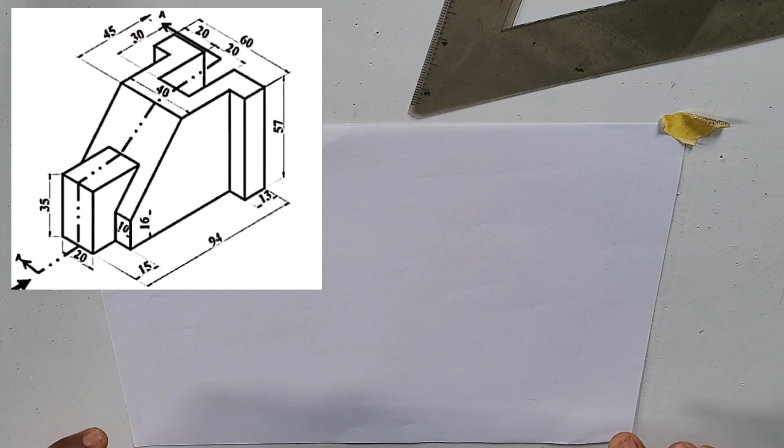Today we are going to draw an isometric drawing as you can see on the screen. To start the isometric drawing, we're going to first draw our horizontal baseline. This line can be of any length. Pick any point on this line.

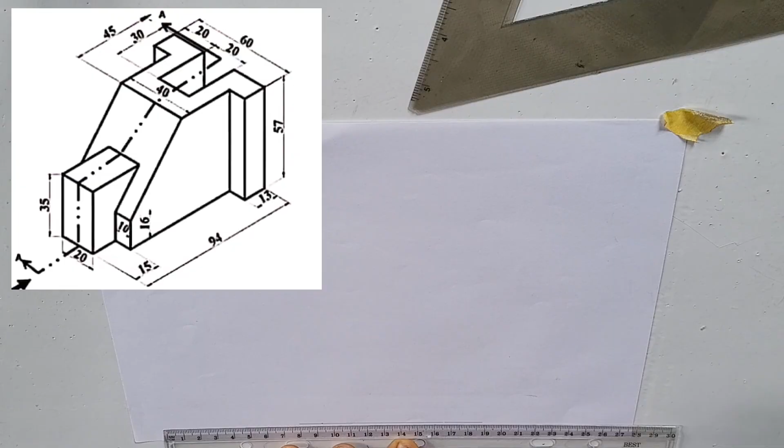From this point we have picked, two lines are going to come out. And those two lines are going to be inclined at 30 degrees to this horizontal baseline. So we're going to use our 30-60 degree set square. This side here is 30 and this side is 60.

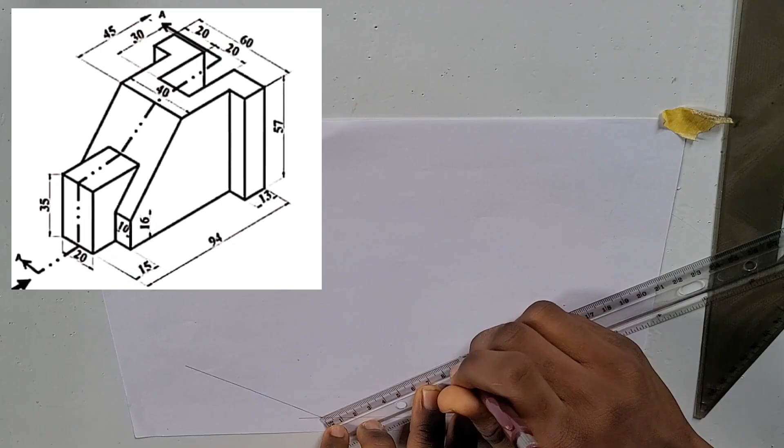On this line, the distance from here to here is 94 millimeters. Let me measure that out. Okay. There's a small block here. The length of this block is 13 millimeters.

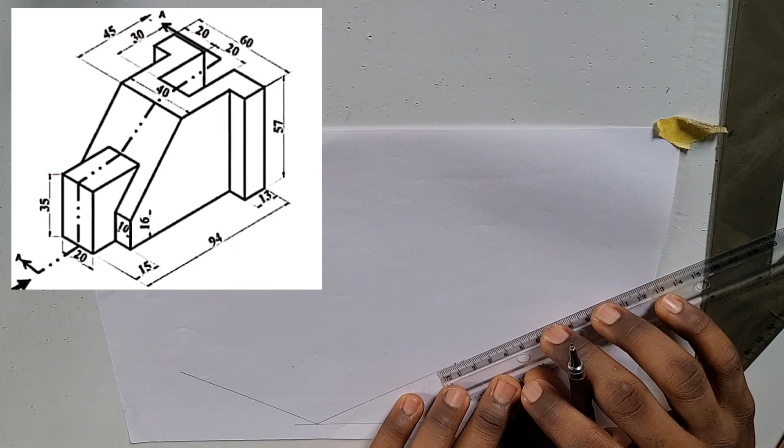From this point, the distance from here to here is 60 millimeters, as shown here. So the distance from here to here is 60 millimeters.

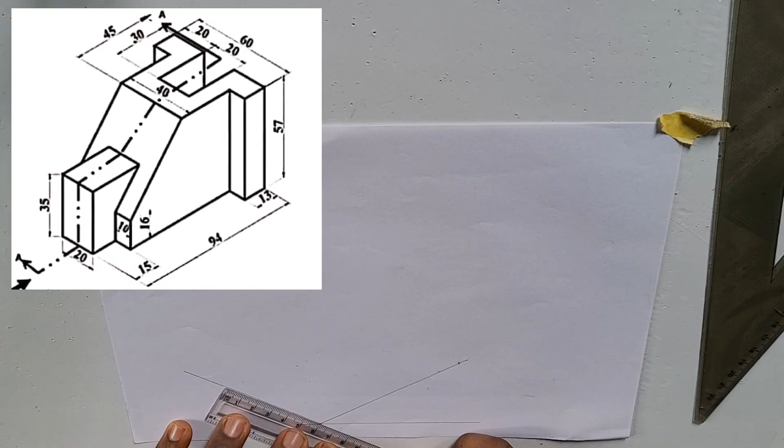So on this block here, the length from here to here is 10. Why? Because on this top part, the distance from here to here is 60. So somewhere here that is 20, there's another place here that is 20, and there's a last place here that is also 20, because 60 minus 40 is 20. The distance from here to here is 10. So 20 here minus the 10 here. This was this 10 horizontal block here.

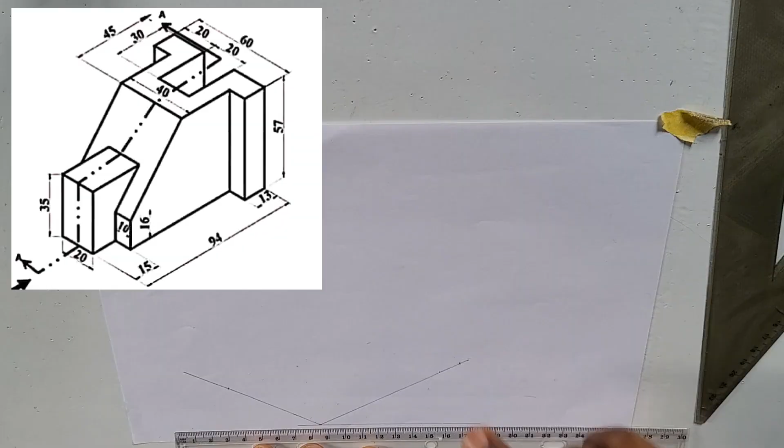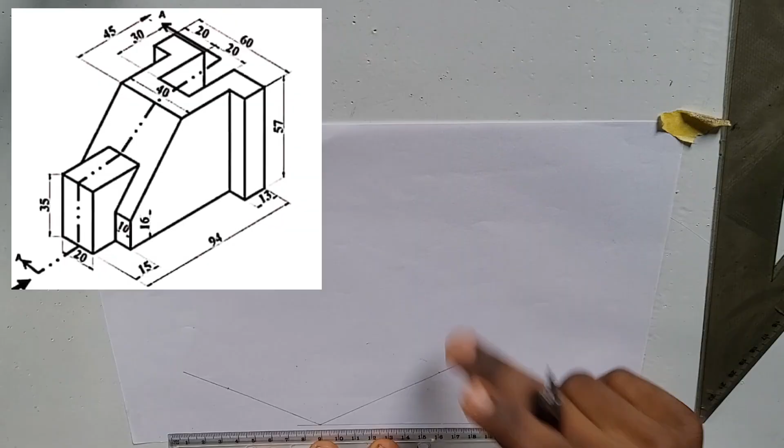Okay. On this small rectangular block here, the distance from here to here is 10 millimeters. Why? Because on top, you see that the distance from here to here is 60. And also, there's another distance that they wrote 20, 20, and the last one is 20, because 60 minus 40 is 20. This 20 has a distance from here to here of 10, as shown here. Which means the other side of this small rectangular part of the block will also be 10, because 20 minus 10 is 10. So I'm going to mark out 10 here.

Now from this part, we're going to draw a horizontal line all the way here.

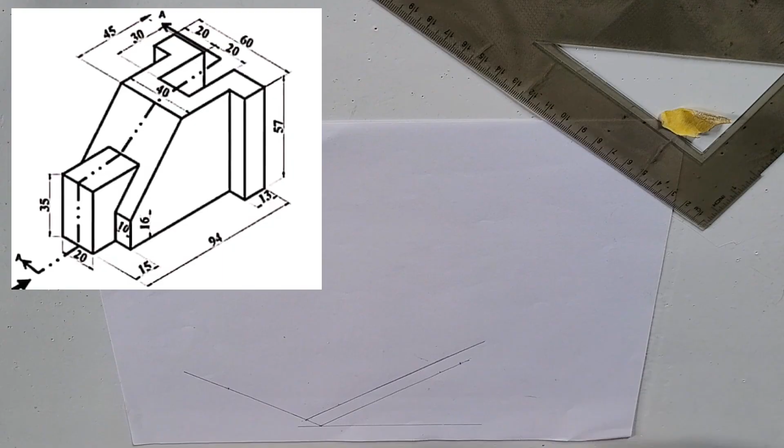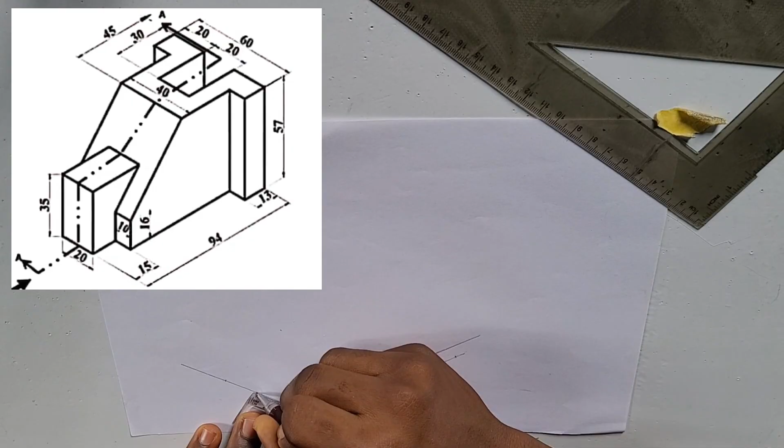Okay? From here to here is 10. From here to here, there's another place here that is shown here. From here to here is 10. So I'm going to mark out 10 again. Now from here to here is 20, and we're going to mark that. So from here to here now is 20.

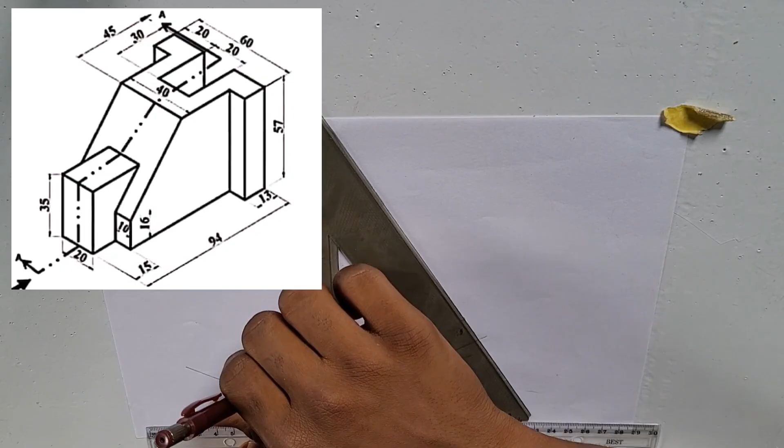From this point, there's a line that comes up. And from this point, there's a line that comes up. Okay. The length of these two lines are 35 millimeters, as you can see. So I'm going to measure 35 millimeters.

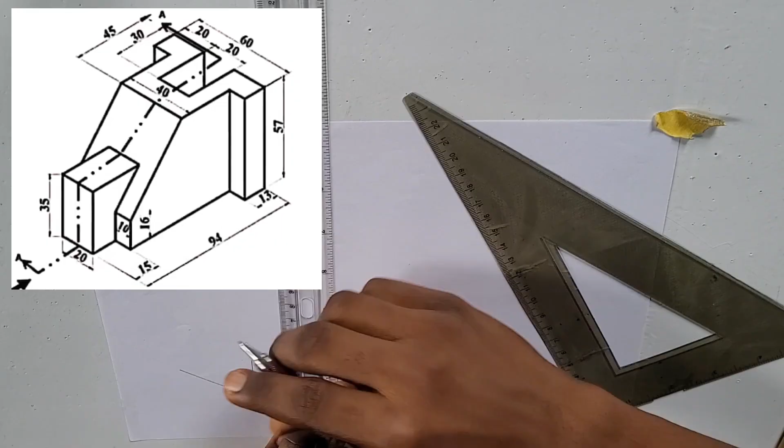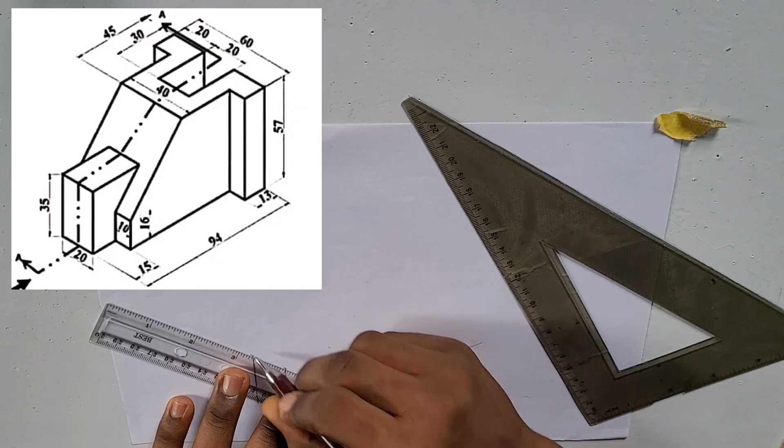Okay. And then we can join these 2 points together with a straight line. From this point, there's a line that goes in like this. The length of that line is 15 millimeters.

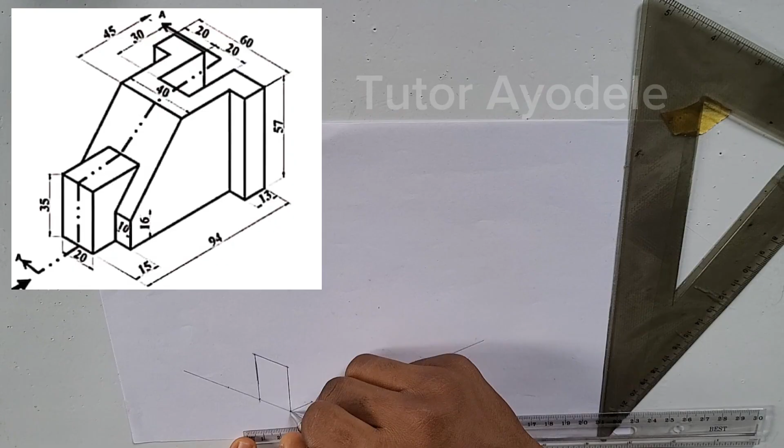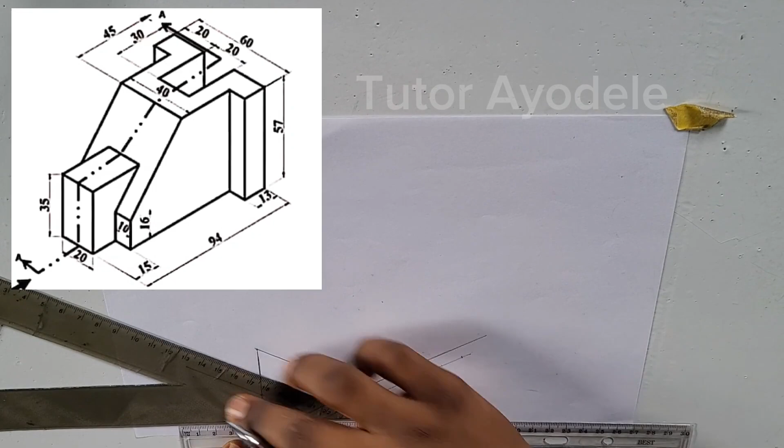From this point, there's a line that comes down to touch this line that we've drawn. It's not shown in the drawing, but this line is just to help us understand which part we're actually drawing. So from this point, there's a line that comes down to touch this line. And because we measured the distance of 10 millimeters, the length from here to here is 10 millimeters. Then I'll erase this part of the line out.

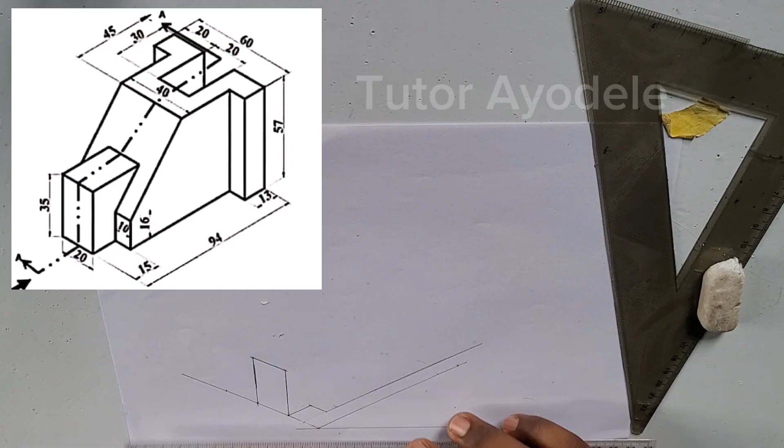Okay. From this point, there's a line that comes up. The length of that line is 16 millimeters, you can see here. From this point too, there's also a line that goes up, and it also has a length of 16 millimeters.

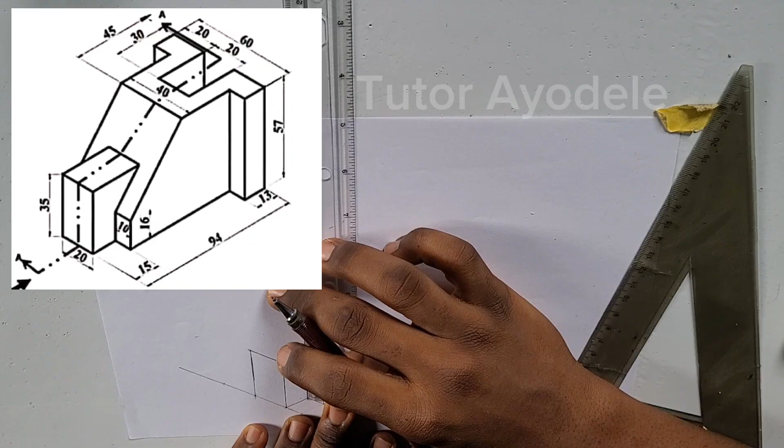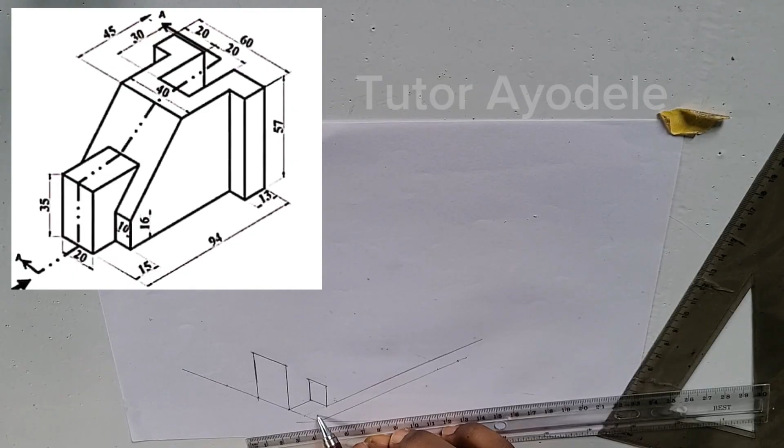Then I can simply draw a straight line to join these 2 points together. Okay. On this line now, the distance from here to where this block is, is 94 minus 15 minus 13. So the length of this line here is 94 minus 15 minus 13, and the answer is 66.

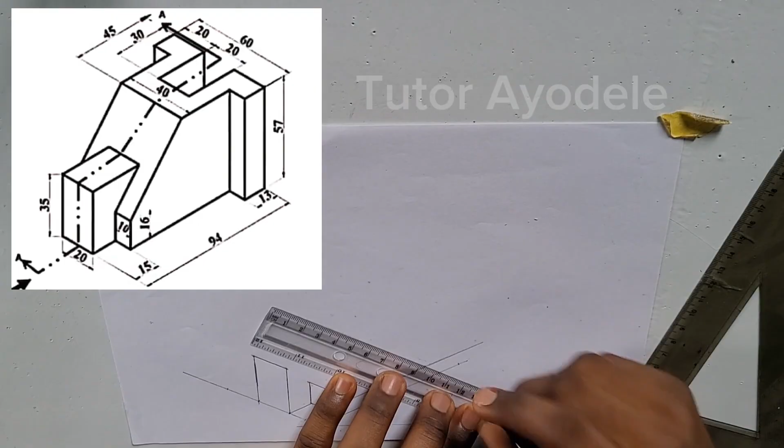Okay. So from here to here, I can draw a line to join these 2 points together. From this point, there's a line that goes upwards. From this point, there's a line that goes upwards. From this point, there's a line that goes upwards. All three lines are 57 millimeters. So I'm going to draw 3 lines upwards.

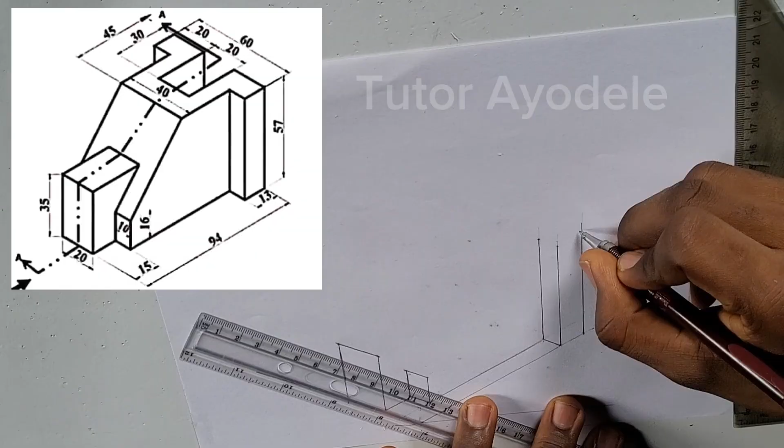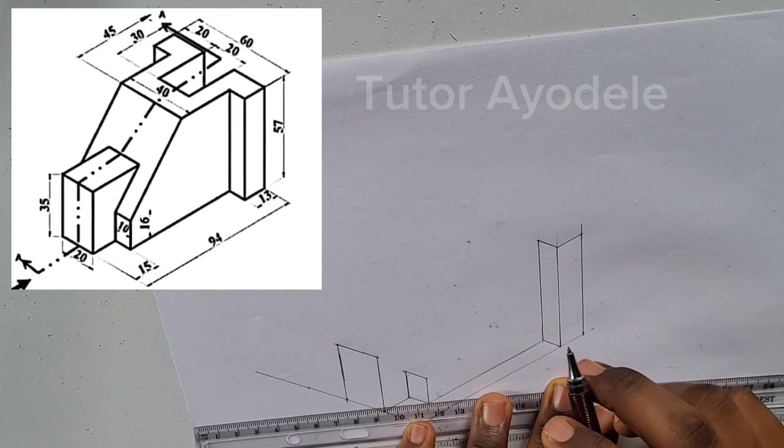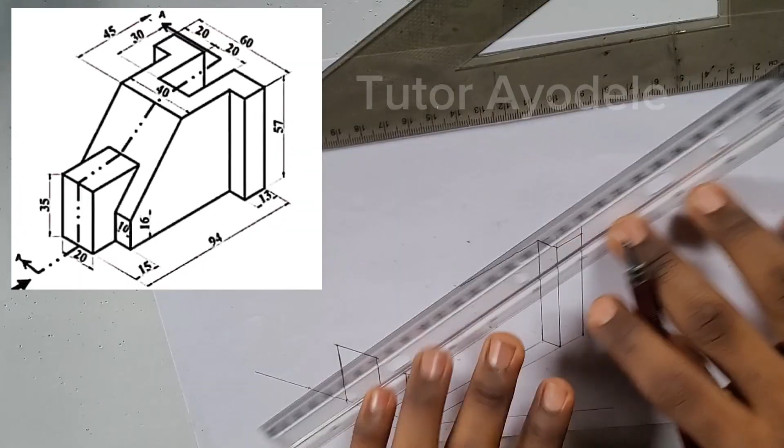Then I'm going to join these 3 points together with straight lines. Okay. From this point, there's a line that comes down like this. The length of this line here is 45 minus 13. So 45 minus 13 is 32. It's not 22.

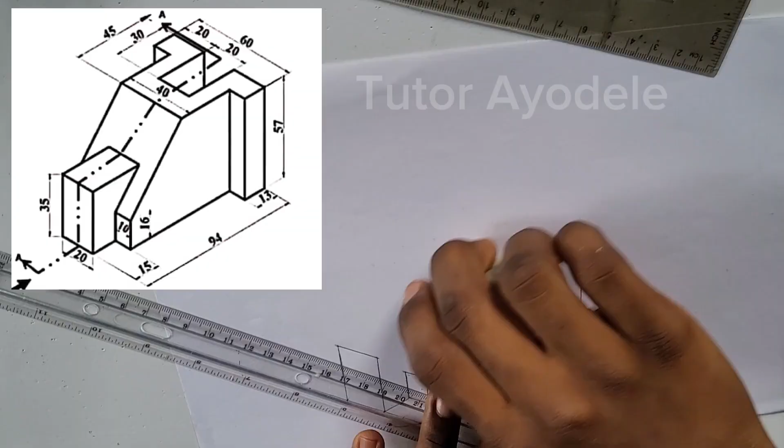So from this point, there's a line that joins these 2 points together. So I'll just connect them with a straight line. Now erase this line.

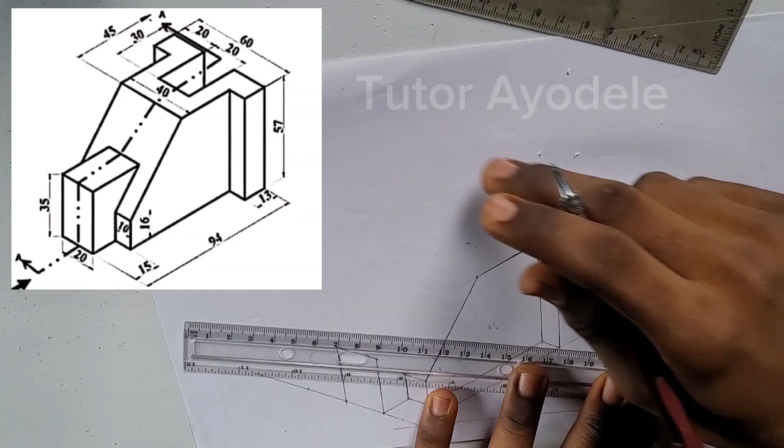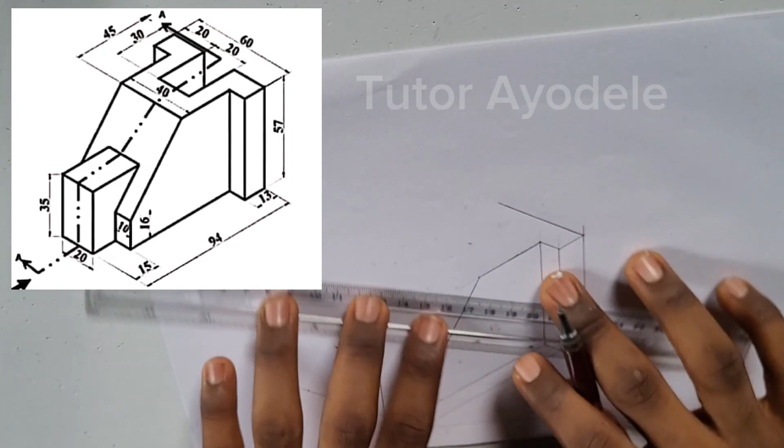Okay. From this point, there's a line that goes in like this. The length of this line is 20 millimeters. Why? Because 60 millimeters minus 20, minus 20 equals 20. The 3 twenties here will add to give 60. So from here to here is 20. From this point, there's a line that comes like this. The length of this line is 30.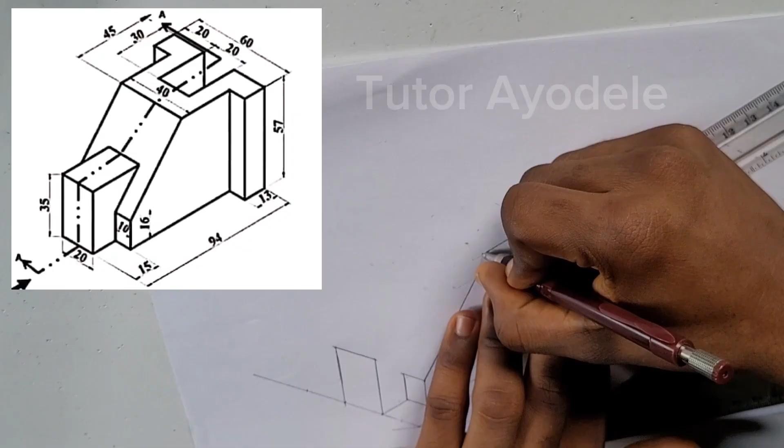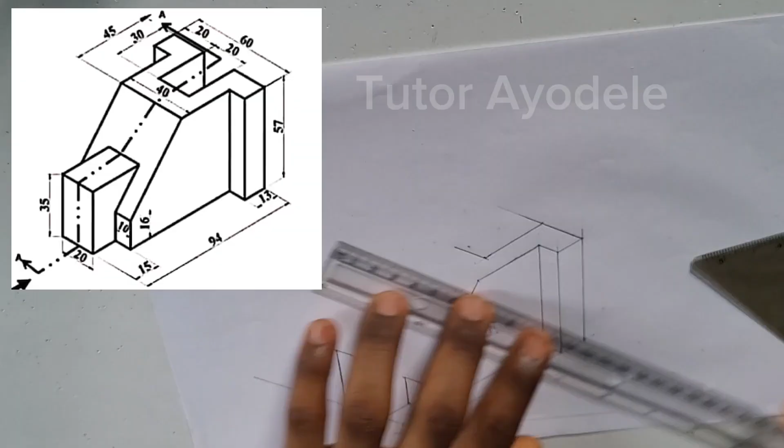From this point, there's a line that goes like this. The length of this line is 20 millimeters. From this point, there's a line that comes down. The length of this line is 30 millimeters. It's the same as this one, so the length of this line is 30 millimeters.

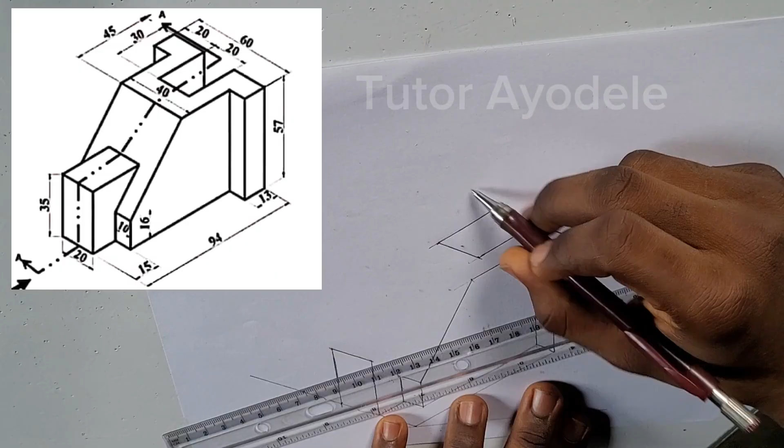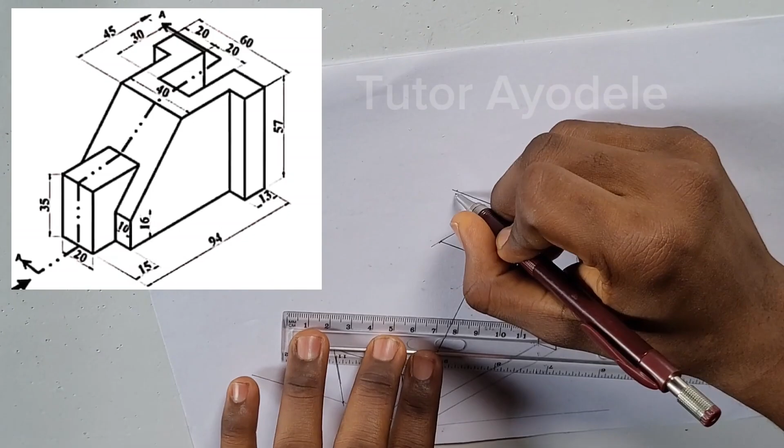From this point, there's a line that goes this way. The length of this line is 20 millimeters. From this point, there's a line that goes this way, that comes like this. The length of this line is the same as the length of this line, which is 13 millimeters.

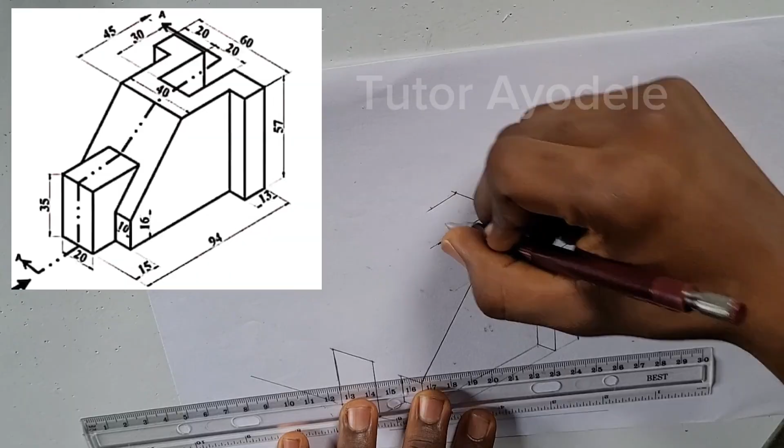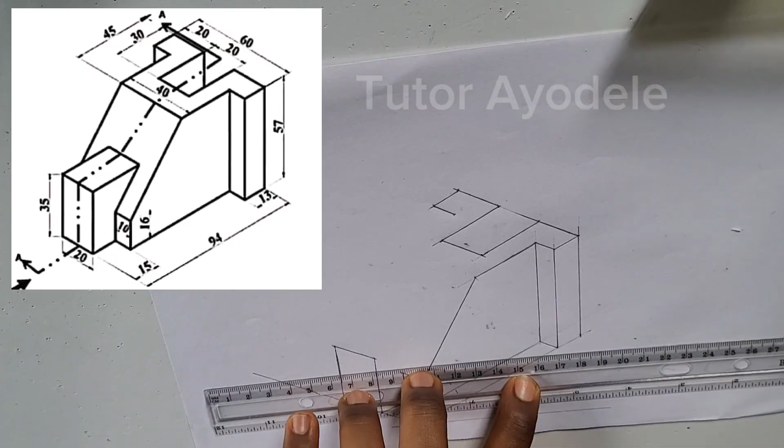From this point, there's a line that comes in like this. The length of this line is the same as the length of this line, which is 10 millimeters. From this point, there's a line that comes this way. The length of this line is 45 minus 13, and that is 32. And I can join these 2 points like this with a straight line.

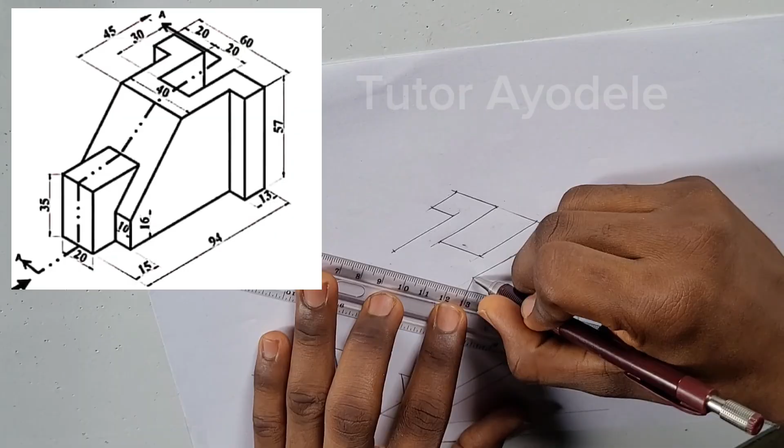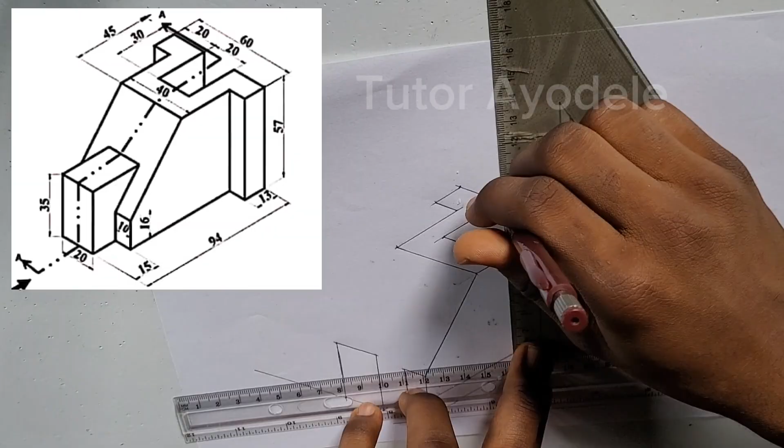Okay. From this point here, let me erase this side. From this point here, there's a line that comes down. We'll just draw a straight line down. From this point also, there's a line that comes down.

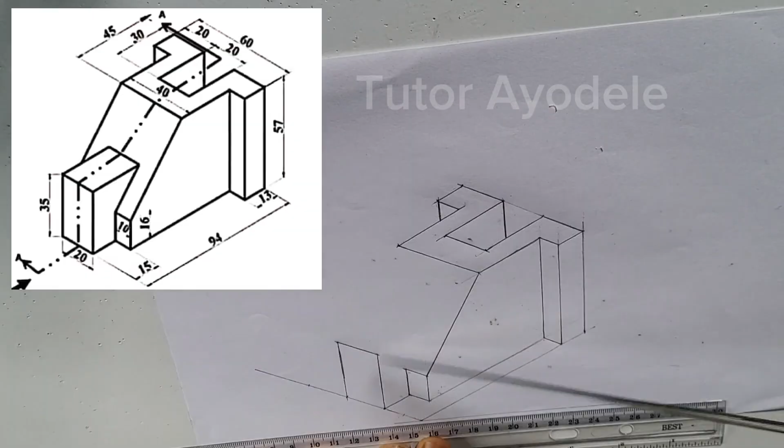So from this point to this point, there's a line that comes there. The length of that line is 30, because from here to here is half of the line. So if this is half, that means the full length of the line is 15 times 2, and that's 30. The same line comes from here and moves this way.

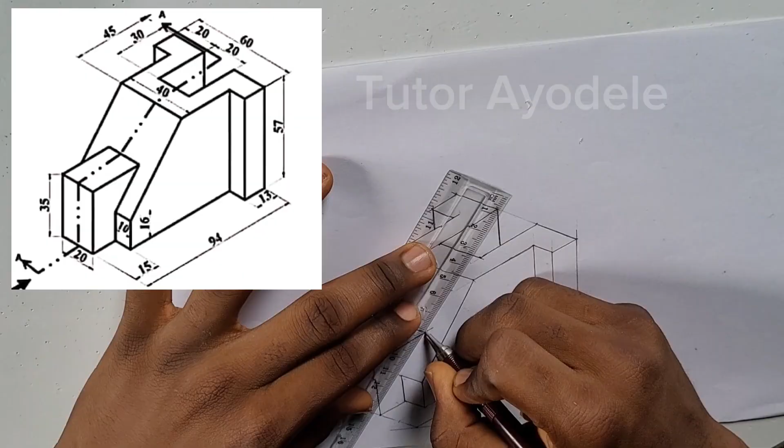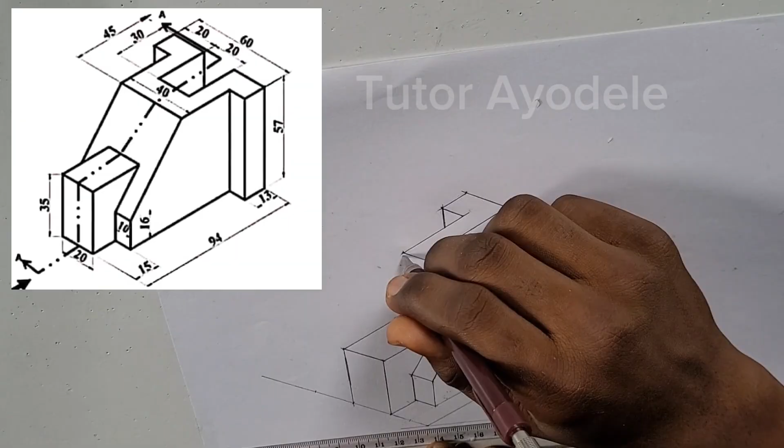Next, I'll join these 2 points together with a straight line. And then I'm going to join this point and this point with a straight line. So to get where we'll draw this line, we'll first of all draw a line from here to here. We'll measure the length of the line as 40 millimeters, because the length from here to here is 40. When we get the length of 40, we'll then join the 2 points together.

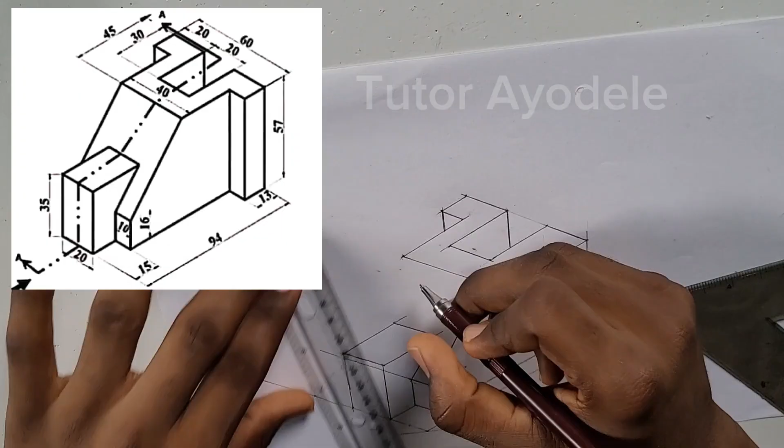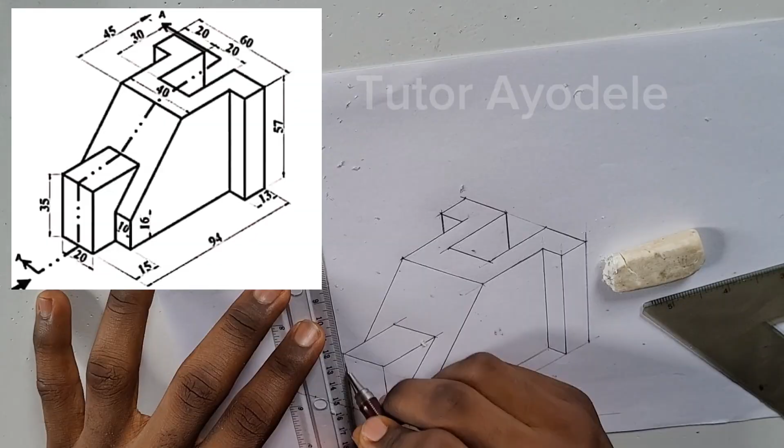So using our set square, we're going to extend this line a bit. After joining the 2 points together, we're going to erase this line because it's not needed. We're going to measure the length of 40 millimeters. And then from this point and this point, we're going to join them together. The line does not have to touch this point because this place is blocking it. So the remaining thing now is to thicken out our work and to dimension it.